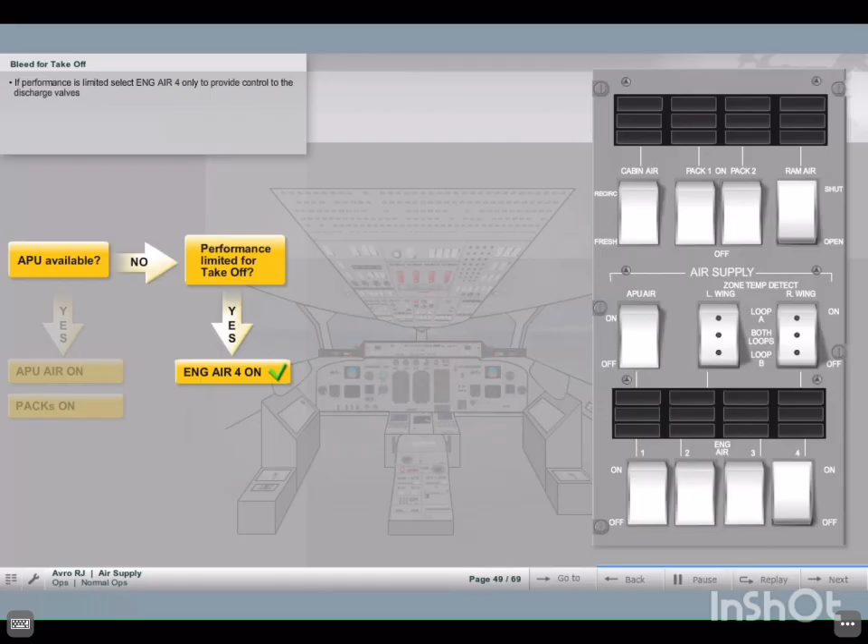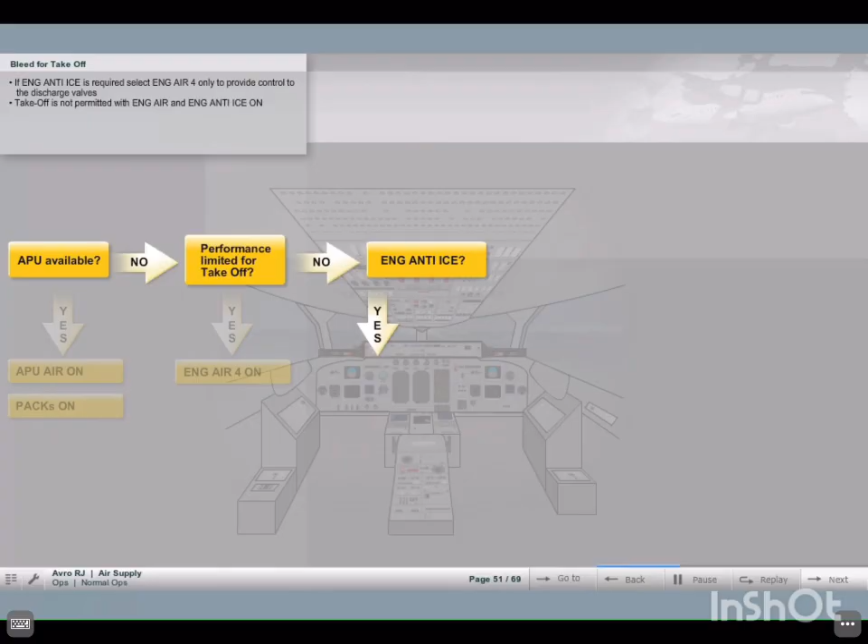If performance is not limited, we must then consider if engine anti-ice is required. If engine anti-ice is required, takeoff is performed with engine air 4 only selected on to provide control to the discharge valves. Takeoff is not permitted with engine bleeds on and engine anti-ice selected on.

Click on the air supply panel to set up the bleed configuration as shown in this example.

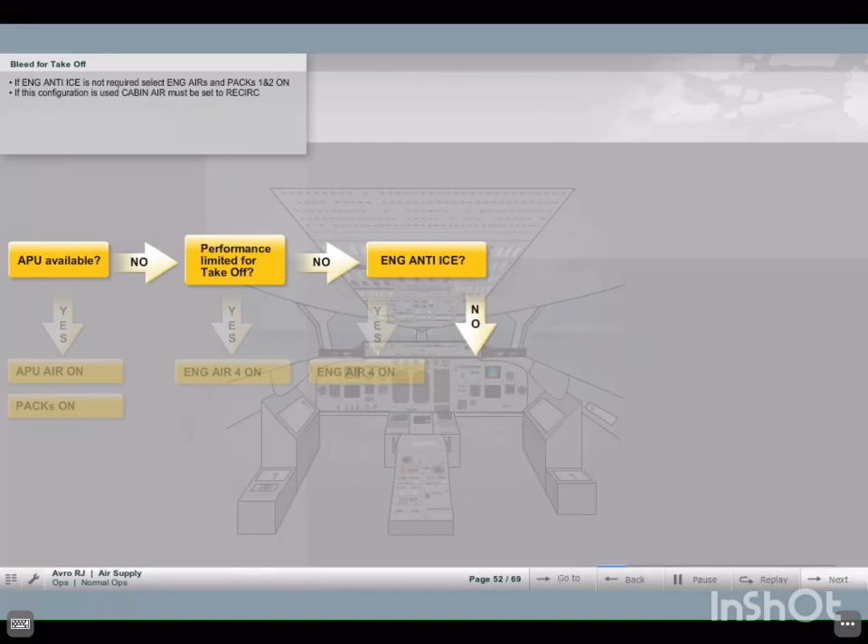If engine anti-ice is not required, takeoff is performed with engine airs and Pack 1 and Pack 2 selected on. If this configuration is used, cabin air must be set to recirculate to minimize performance loss.

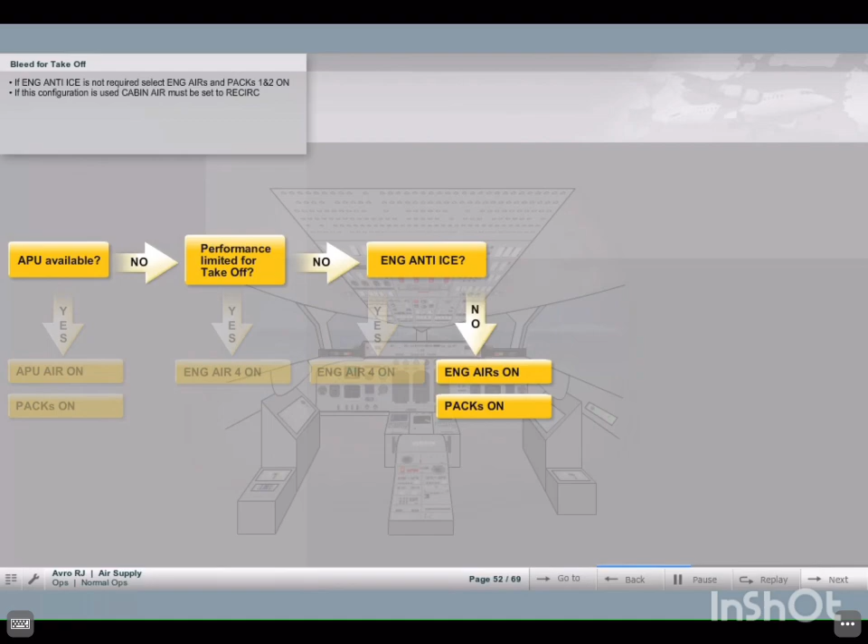Click on the air supply panel to set up the bleed configuration as shown in this example.

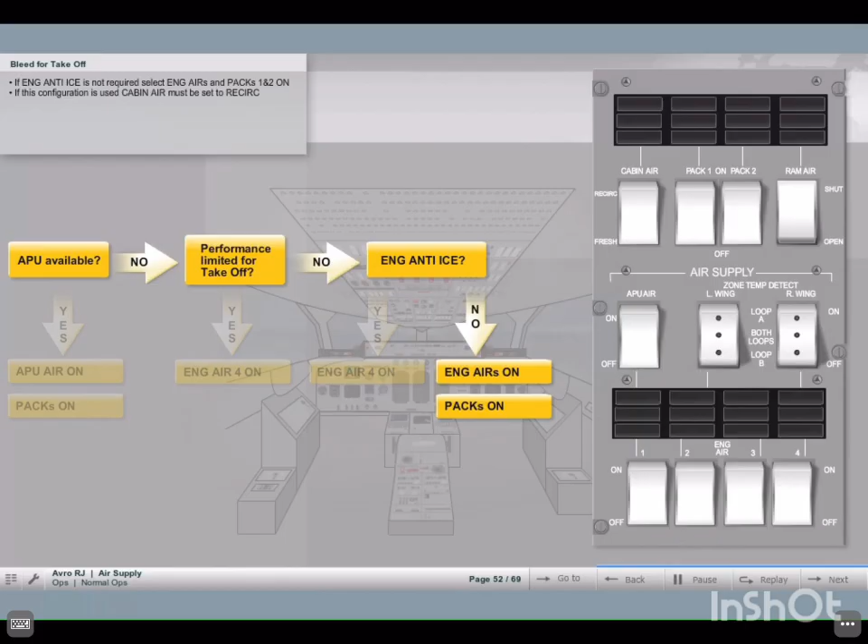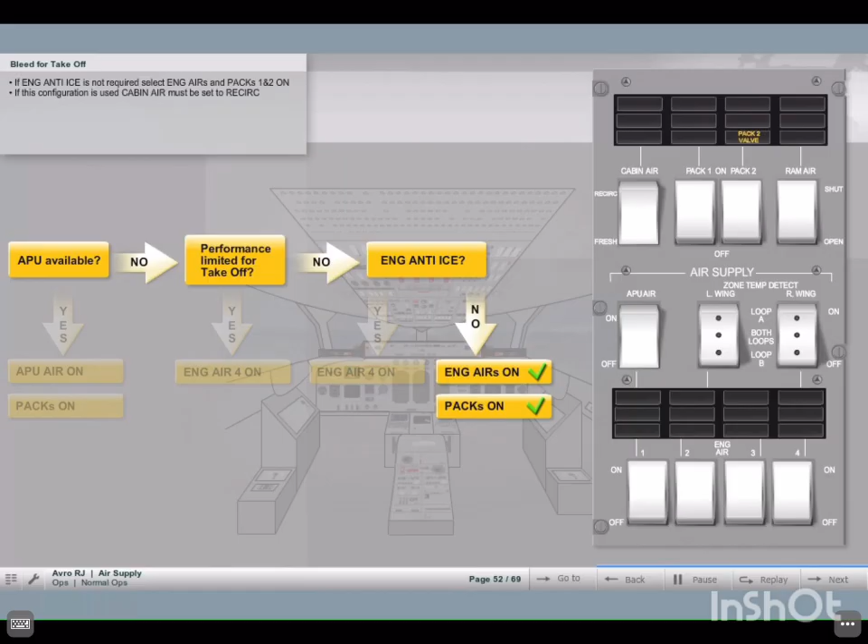If engine air was not used for takeoff, it should be switched on after takeoff and APU air switched off.

When APU air is switched off, check that the APU valve not shut and APU non-return valve leak annunciators are out. The APU may then be switched off.

Under normal conditions, no other changes to air supplies will be necessary in flight until the aircraft is being prepared for landing. Where possible, engine air should be used for landing to reduce APU usage.

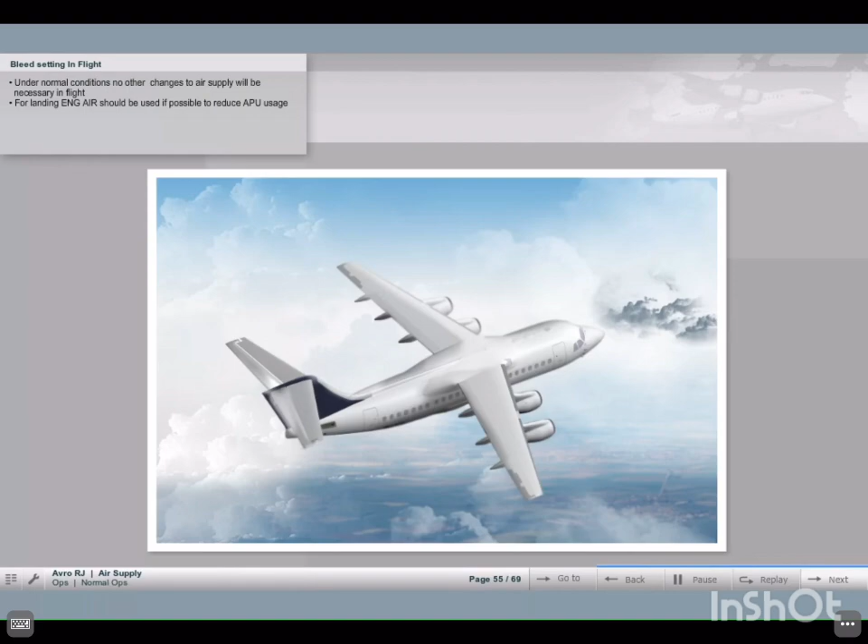With engine air on, performance will only be limiting in conditions of high temperature and high altitude during a go-around. Engine air on is also not permitted with engine anti-ice on during a go-around.

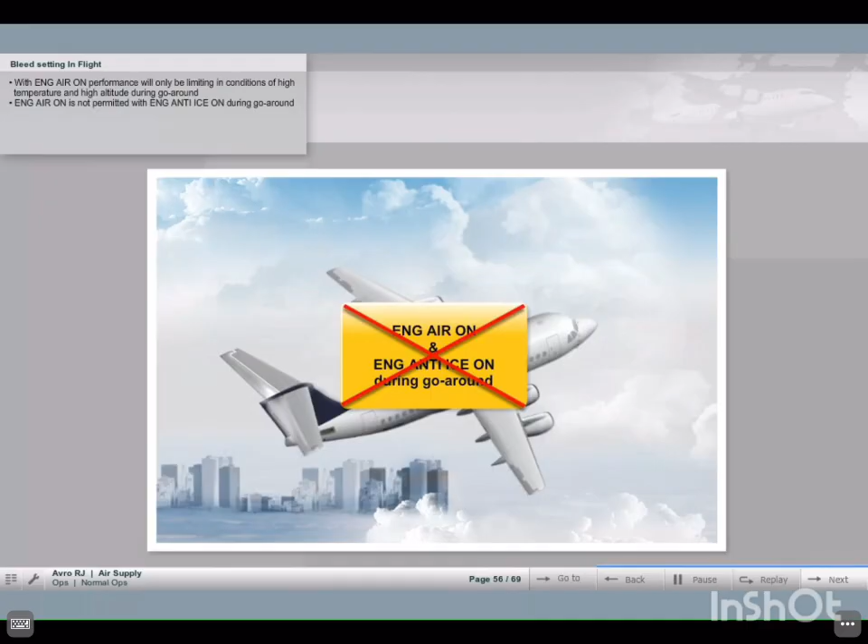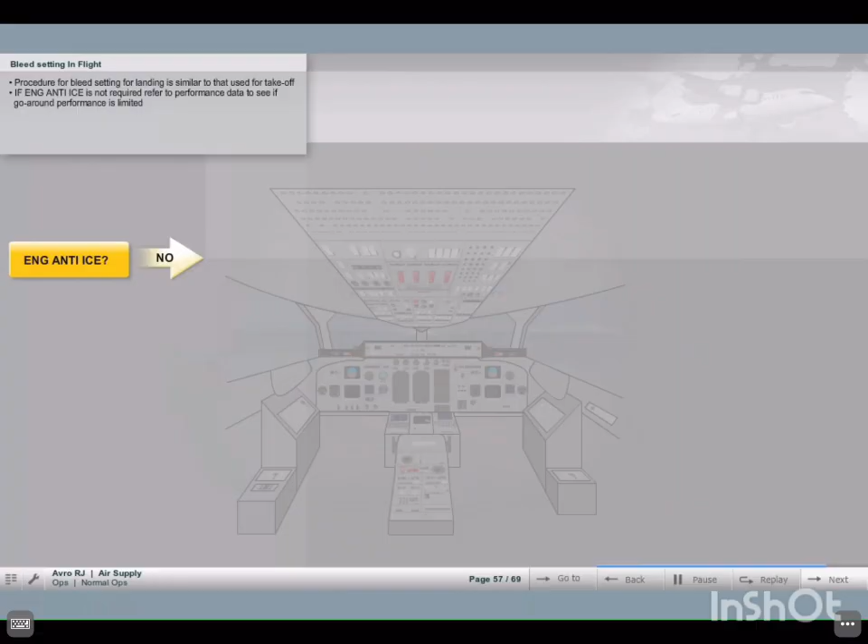The procedure for deciding how to set up the air supplies for landing is similar to that used for takeoff. If engine anti-ice is not required during the approach and go-around, we must refer to the performance data to see if the go-around performance is limited.

If performance is not limited, then engine airs and Pack 1 and 2 remain on and the cabin air is selected to recirc.

Click on the air supply panel to set up the bleed configuration as shown in this example.

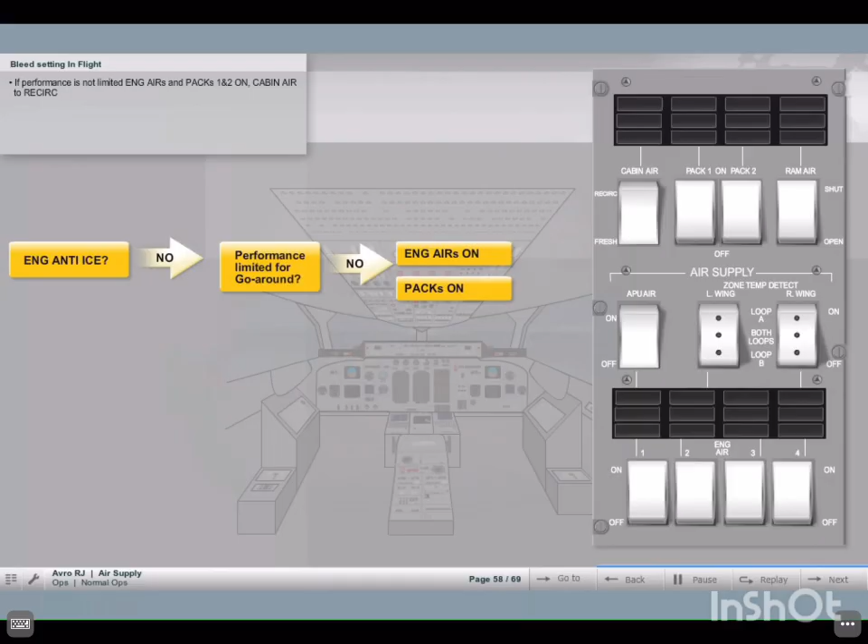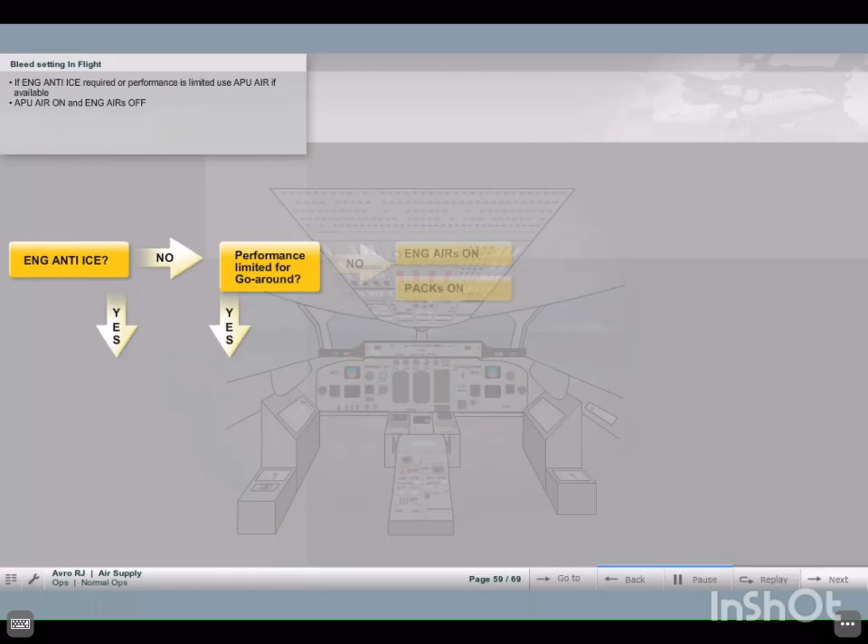If engine anti-ice is required or performance is limited, then APU air is selected on if it is available and engine airs are selected off.

Click on the air supply panel to set up the bleed configuration as shown in this example.

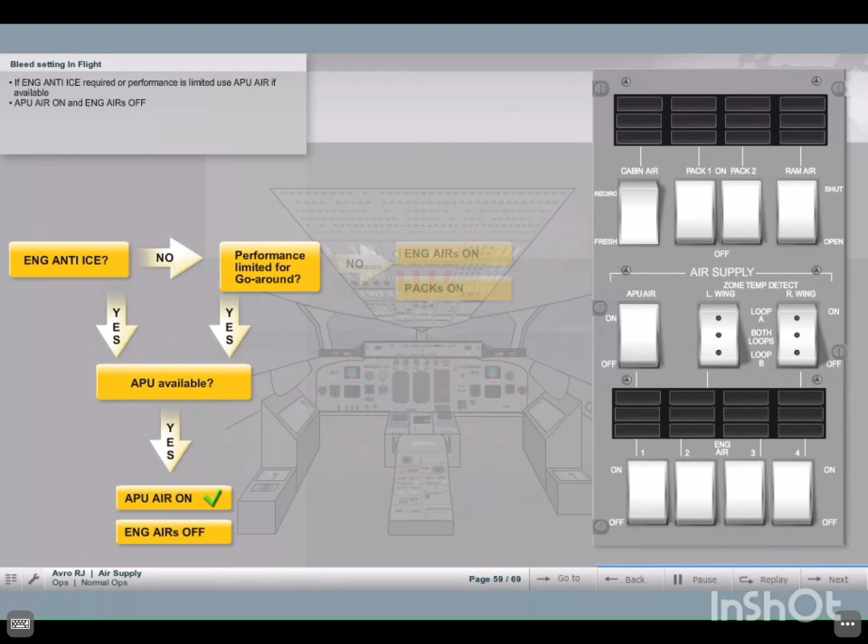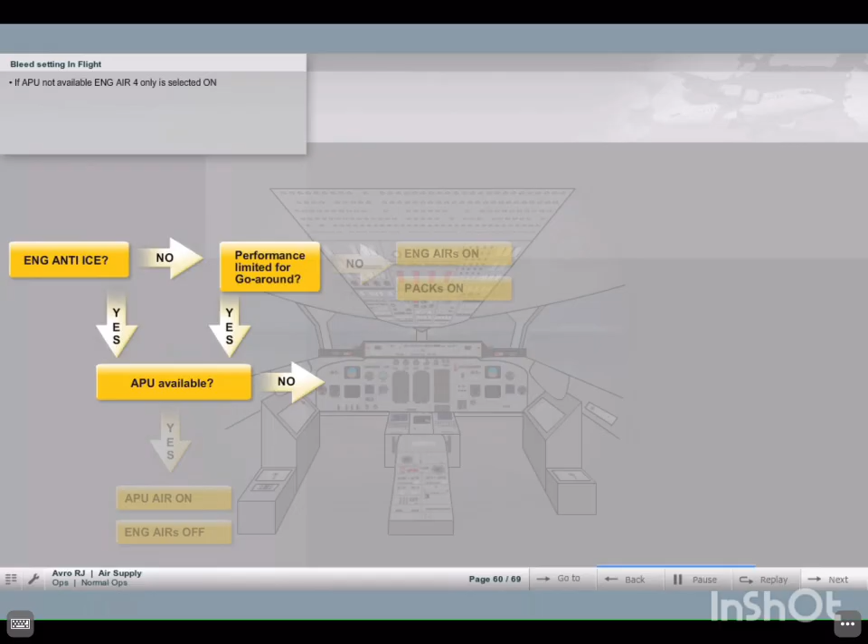However, if the APU is not available, then Engine Air 4 only is selected on.

Click on the air supply panel to set up the bleed configuration as shown in this example.

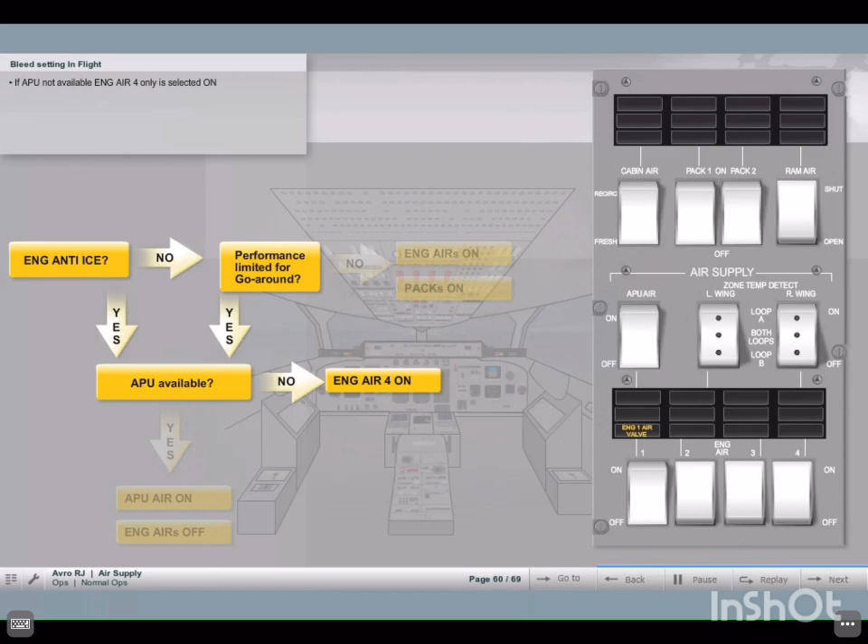Where possible, air switching should be completed by 500 feet AAL. Air switching must be completed by 200 feet AAL.

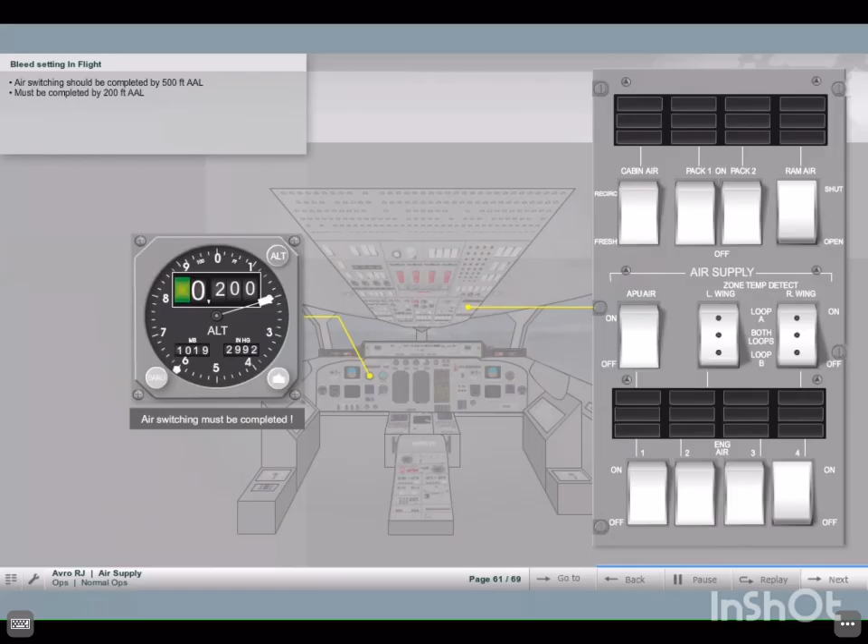If the APU has not been started before landing, it may be started once the aircraft is on the ground to provide air conditioning after main engine shutdown.

Between 2 and 5 minutes after APU power available illuminates, APU air can be selected on. Engine air can now be selected off.

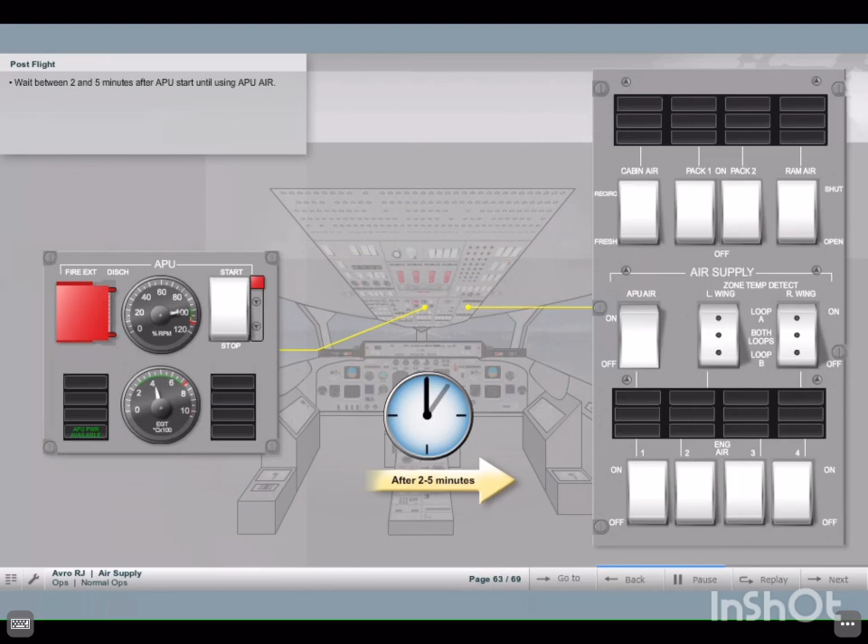If the APU is to be shut down, both packs and APU air should be selected off first. On ground, the APU is shut down via the APU overspeed button on the ground test panel.

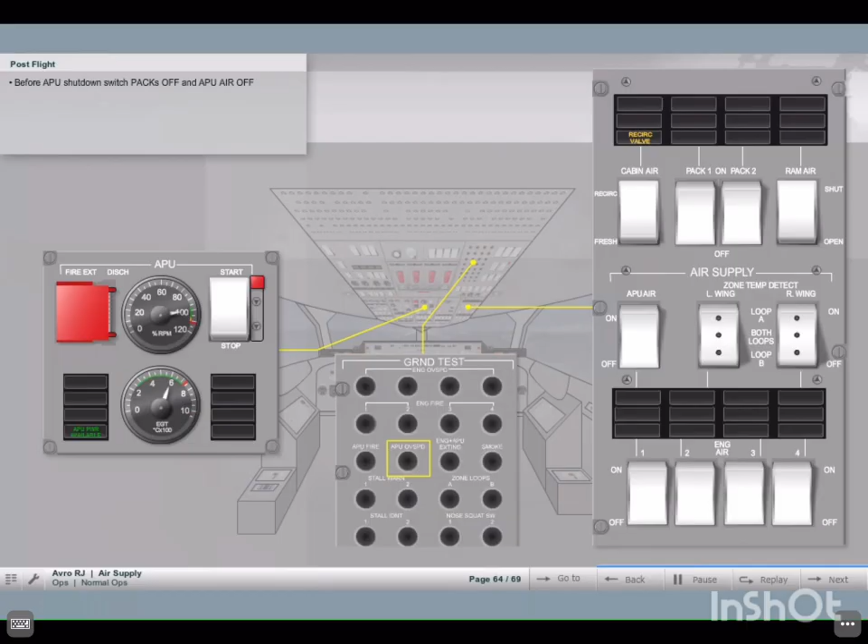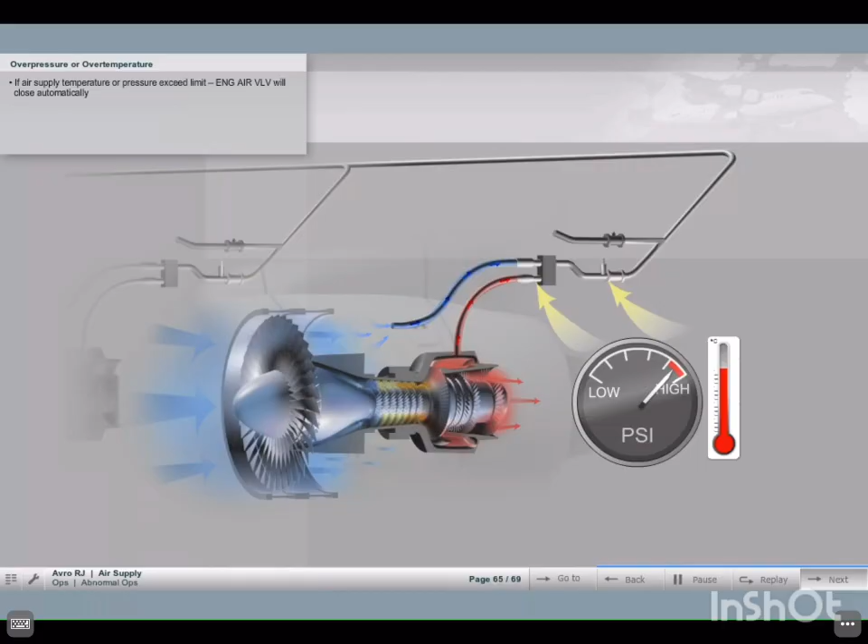If the air supply temperature or pressure exceeds their limits, the associated air valve will automatically close. This will be indicated by the engine air fault annunciator. The engine air valve annunciator will light to indicate that the valve has automatically closed. Engine air fault will remain lit for 60 seconds after valve closure and will then extinguish automatically.

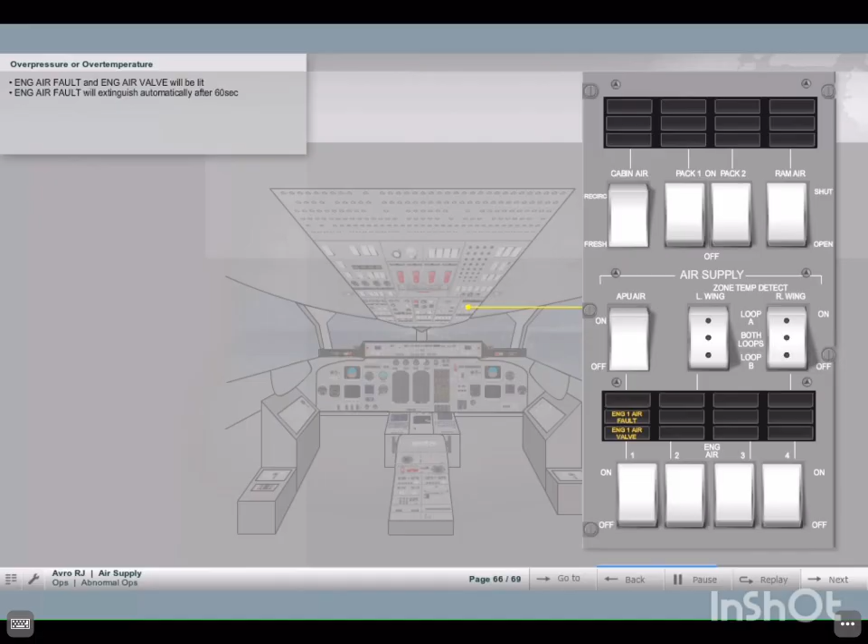The relevant engine air switch should be selected off. After 30 seconds, it may be selected on. If the engine air fault annunciator remains extinguished, the system may be used as normal.

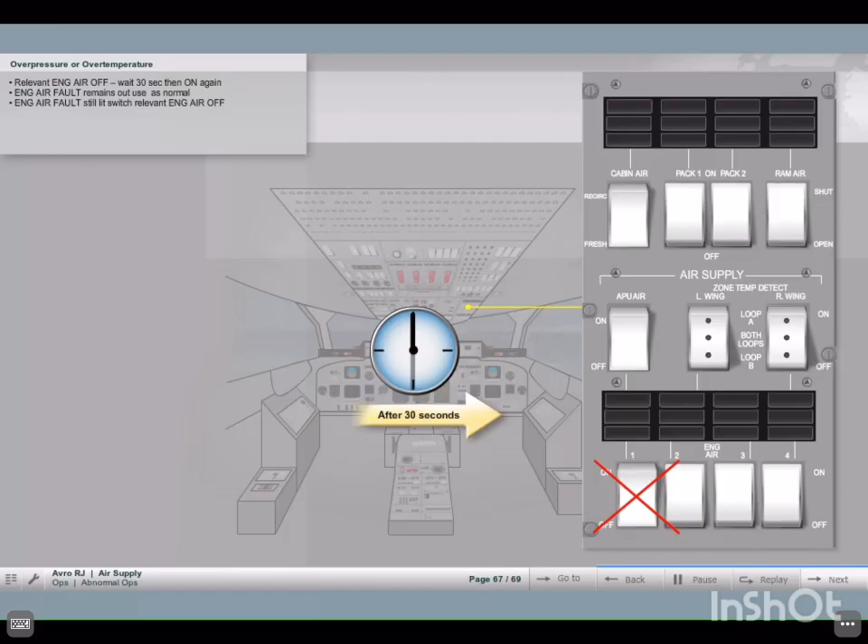If the engine air fault is lit again, switch engine air off at the affected engine and leave it off for the remainder of the flight according to QRH. The remaining engine's bleed air can supply the rest of the system on the affected side.